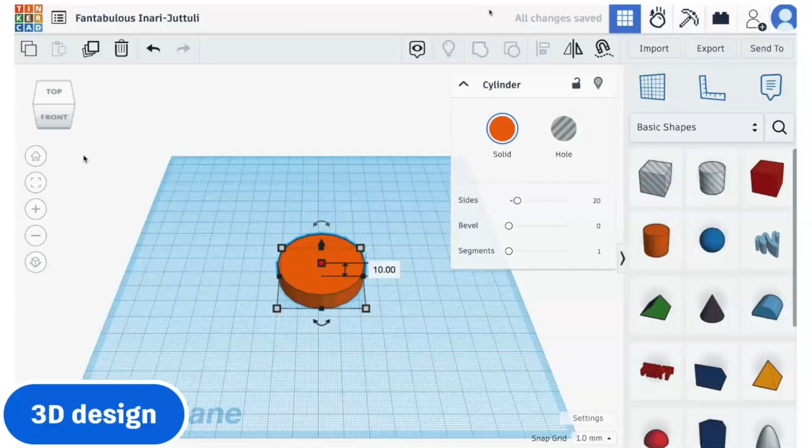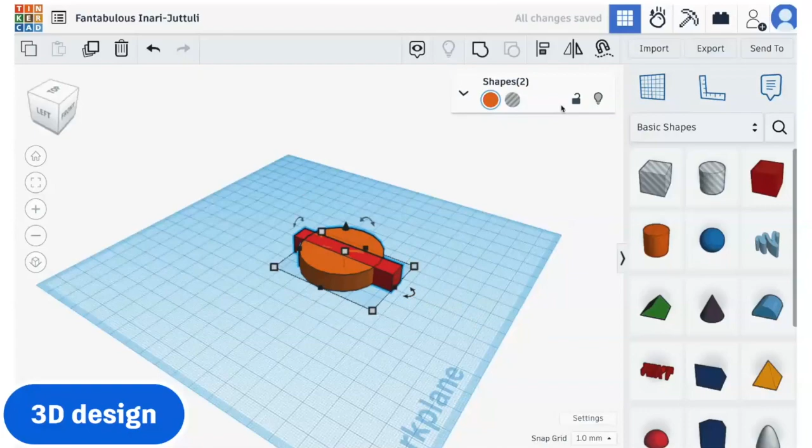Before we get into code blocks, Christian mentioned there are 3 different applications within Tinkercad, and I want to preview that so you know the scope of what you could be designing with, in case you're new to Tinkercad. Lately we've talked a lot about 3D design, which is what the majority of our webinars have been on so far. In the 3D design space, you can combine multiple shapes to make just about anything in this very intuitive interface, so students can design different parts, models, and 3D worlds. In our previous webinar, we talked about SimLab, an exciting way to simulate real-world physics with your designs. As a reminder, if you've missed past webinars, you can check out the recordings on the YouTube channel.

Another application space we plan to talk about in the future is called circuits. This allows you to drag and drop electronic components to build electronic circuits right in this interface, and actually simulate what those circuits might do if you were to build them on the table in front of you. You can bring in different types of microcontrollers to program and work with both analog and digital things in this simulated space, which is super cool.

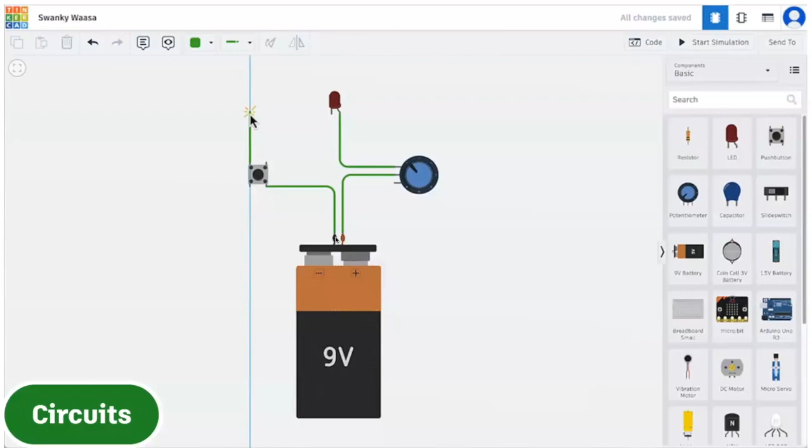And code blocks, I'm not going to talk too much about this because we're super excited to be focusing on that tonight. But as you'll learn, it's a great way for students to apply computer science principles to make really fantastic 3D shapes, and that's what we're looking to learn tonight. On that, I'm going to stop sharing and hand it over to Christian, who's going to get us started with code blocks.

Let me share my screen here. I'm going to take you guys through a couple of projects, and then I have a few extra projects we'll look at the end. To get started with code blocks, all you need to do is log into Tinkercad. Then you have this blue create button, and I can create a code blocks design type. You can see the other types there that Jason just mentioned. So here's my code blocks editor. On the left-hand side, you see my blocks panel, and this is the blocks editor here, and this is my 3D editor over here.

So here's my new one. Okay, there we go. Now if I right click around in here, I can orbit around in the 3D space. If I use my zoom wheel, my mouse wheel, I can zoom in. You can see I zoom in, I see these 3 axes here - this is the X, Y, and Z. X is the red one, Y is the green one, and Z is going up, the up direction. I'll be referring to these a few times throughout the session, but let's just get started and I'll show you code blocks 101. Drag a block, there we go.

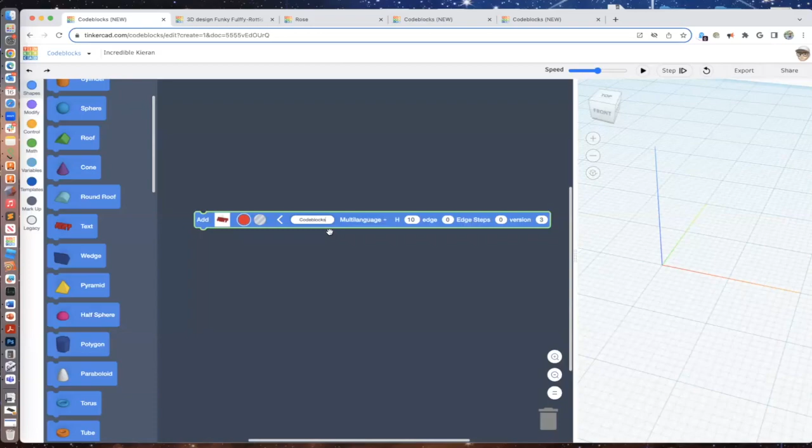Let's call this a text block. I just dragged this blue text block out, and I'm going to say let's call this 'code blocks.' I'm typing the text 'code blocks' here. So I don't see the 3D object yet.

To see the 3D object, or the result of my stack of blocks, in this case one block, I can click play, and voila, I get the code blocks here. I like it. I'll just zoom out a little bit. I can resize these back and forth so you can see how you can work back and forth on them. You can also zoom in and out with the code blocks here.

I'll leave them somewhat big so you can see them. I know we're a little tight on space, so I'll just use the panning. Maybe I'll go a little farther out. I'm going to adjust the height here.

Once I have the block in the actual blocks workspace, I can change the parameters of these blocks. So I don't want it to be 10 millimeters tall. These units are in millimeters, by the way. So this text is 10 millimeters tall.

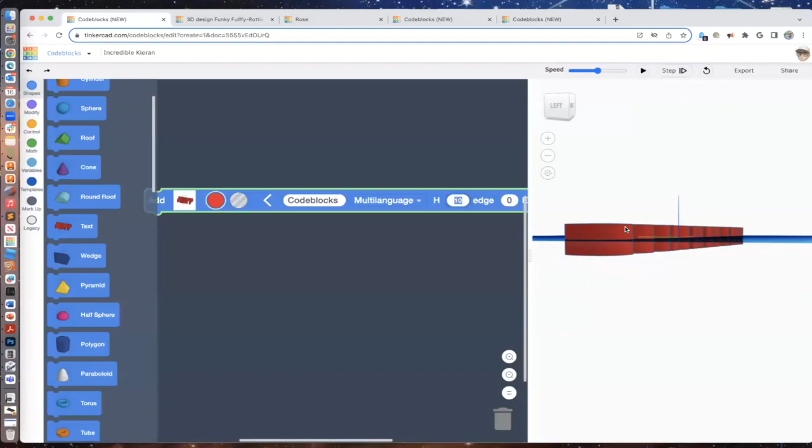You can see it put it right at 0,0,0, where those X, Y, and Z axes intersect—that's called the origin, 0,0,0. Since it's 10 millimeters tall, the text is 5 above and 5 below, because it references the center of that text when it places it.

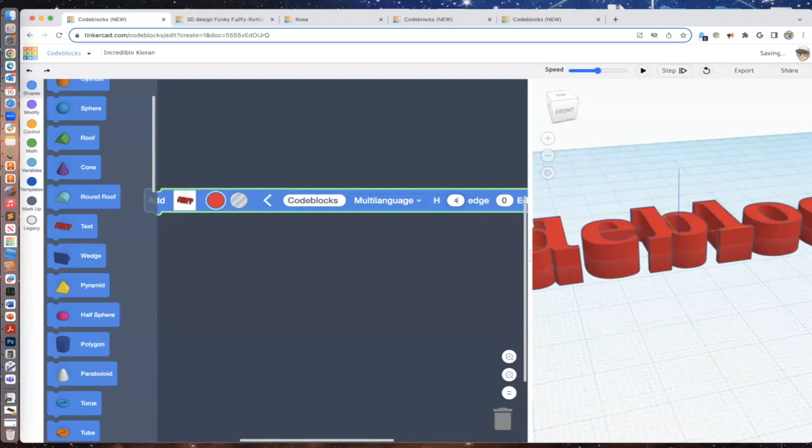So I can make this 4, and if I play it, it's going to be much shorter. Since it's a total of 4 high, it's 2 above and 2 below. So what I want is for that text to be on top of the grid.

So I'll come down to my purple code blocks, and I'm looking at a move block. You see this move? I'll drag it right underneath, and I can just snap it underneath, and you'll hear a little snap.

What I want to do is move it up in Z, half of that height. So I'll move it up 2, okay? And I'll play it—you see that?

So it created the block and then moved it up. I'll play that one more time so you can see it. Great. Okay, another thing I can do—this is called a translation. I'm moving it.

Another type of transformation is scale. So I can bring a scale block and pop it underneath there. Let's say I want this text to be half the size it is, so I'll put 0.5 in that parameter. Then I'll play it—so it'll create the text, move it up, and then make it smaller by half the size. Make sense? I think it's pretty easy.

Okay, we're getting somewhere. Let's go ahead and put a backplate here. But before that, let's make the color of this text different. I can click this swatch and change it to, let's make it orange. Okay, let's play that. Great, everything's working as expected.

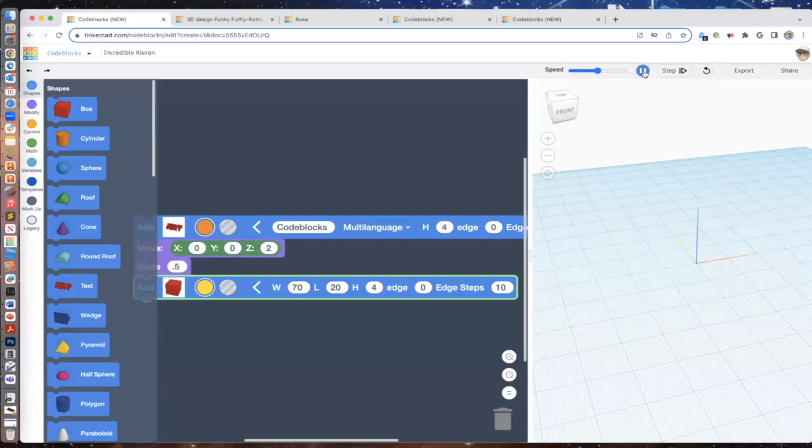Okay, now I have a pretty big box back there. That might be too big. So I might make this smaller, that kind of thing. Maybe I'll make this 20 and 70 and 20 and then play it. You can see that I get something that looks more like this. And I can keep iterating here. Let's make this 90 and so on and so forth.

Well, that's great. But what happens when I go and change the name? Then the box doesn't fit, right? So let's just call this new text, something like this, and play it. So now I have text, but this box is too big.

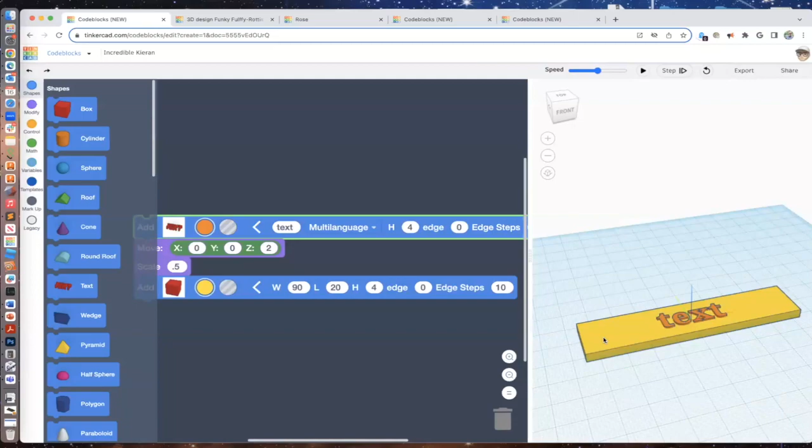Well, we have some handy new sizing blocks that will help us resize this. So I'm going to show you how this works. If I move down here, let me go ahead and put this back to code blocks. Okay, and I'll just play that.

One thing you can do is speed up the way it plays back. I kind of leave it on this average size so you guys can see how this is playing out and what's happening, but we may speed that up later.

So I want to make this box always fit the text. We're building an auto sizing name tag. This name tag will always look great no matter what text you put in there. It's all based off the text, so this box needs to resize itself based on what the text we've entered in there.

So I can come down to these purple oval blocks. This one says size, and I'm going to say I want this size, the width of this box, to be the size in that x-axis. So what the size block does is it looks at the previous created object, which in this case is the text, and it looks at the size in the x. Then it puts that number in itself, and you can use that later. So for this box, when I play this, it's going to be the exact width of that text. Watch this.

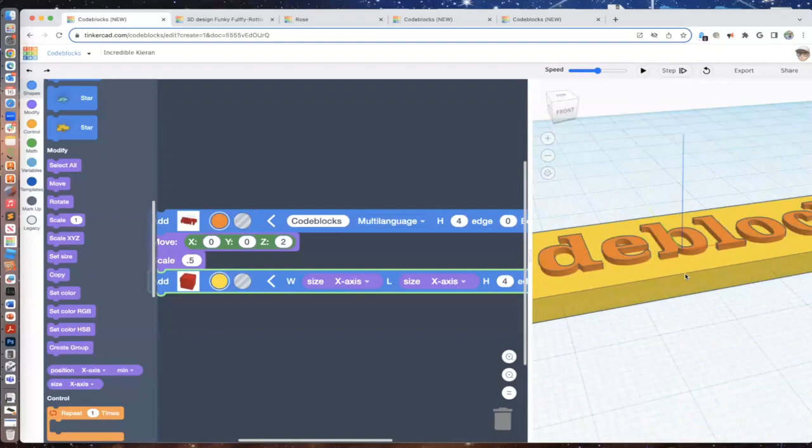Great. Let's do the same for the length of this box. I'll right click on that size block, duplicate, and it follows my cursor. I can put that right in there, but I don't want the x-axis, I want the y-axis, which is this green axis, the height of the block. So I'll say y, and now play. Great. Awesome, so it's totally fitting it perfectly.

Now, no matter what I put in here, I could just put in my initials, right? And it will perfectly fit. You see that? Great, this is what I want. This is the start of my auto sizing name tag. I'll put it back to code blocks, play it, and everything's working as expected.

Good, now I don't want it to fit so tightly, so what I want to do is do some math. And this is very easy, don't get intimidated by math, it's very simple. This is a good one maybe to show your students. I'm grabbing this one with the two circles on each side and an operator in the middle. I want it to be this size, but I want to add a certain padding, so I can say let's put 5. Okay, so I have the size of the text plus 5 in the width.

And I'm going to do the same here. I'll drag that out, put this one in here, and make it 5, so I can have that length be that. Okay good, so that's the size of the box. I could also do the height, in case my height changes. I can come back and grab a size block and put it in here, but I want the z-axis for this because that's the up direction, right?

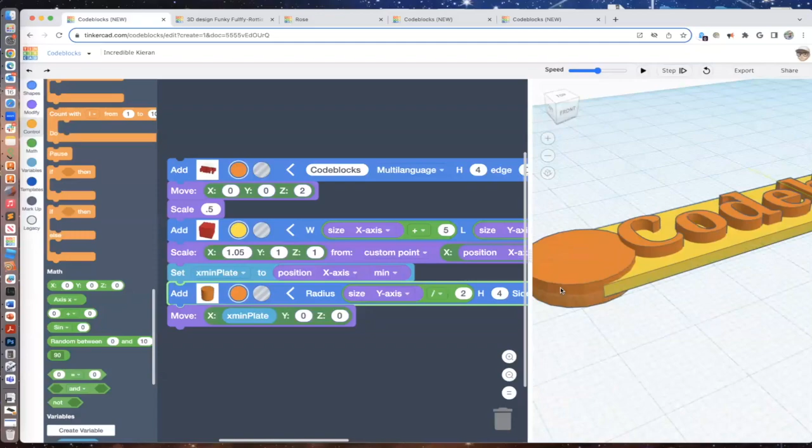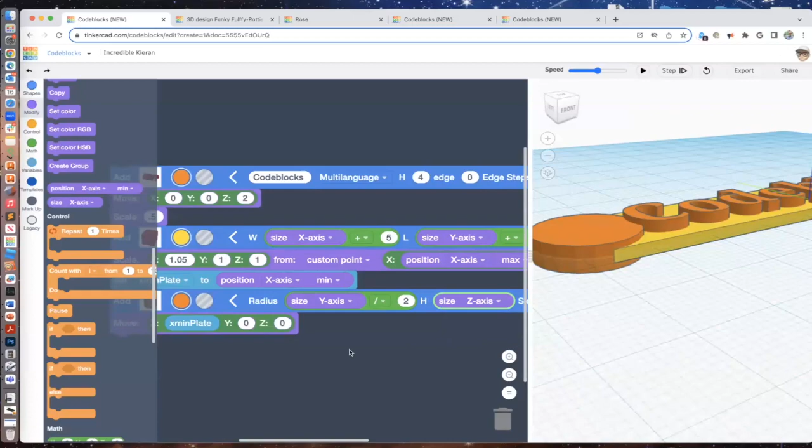I want this to be the size in the z-axis, so I'll use my handy size block and make sure that this says z, so I'm matching that block. Okay, let's play this and see where we're at. There we go, see, now this is looking really nice.

And now I only have a couple more steps here, so bear with me. I'm going to right click on this cylinder and duplicate. Now I have 2 of the same things happening, but I want this to be a smaller hole that gets cut out, so I'll say this is a hole.

Also, I'm going to get rid of this green math block with the size in it, and I'm just going to say I want this to be a radius of 4. Okay, so let's play that and see where it brings us. I promise we're almost to the end here, and then we'll see how our code works.

Great, so everything's in place. Now I just need a group. And you can see what grouping does is that if you have hole shapes in your recipe here, it will cut them out. So watch me play this through, one more time.

Great, and of course I can make this cylinder be the same color as the back plate. What I'm going to do is just speed it up by clicking the speed all the way to the right, then playing it, and it will play back a lot faster. And you can see there's my finished name tag.

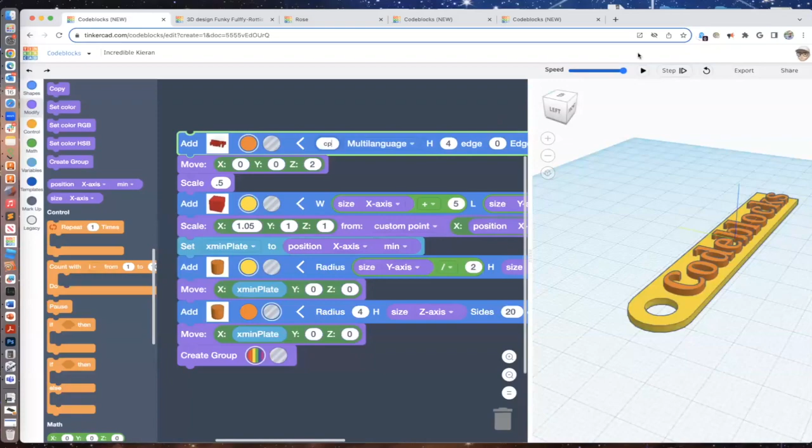Now, the beauty of this, and why I led you through this whole thing, is that you can type whatever you want up here, and using those position and size blocks, it will always fit. I can add a little more space on my scale XYZ if I like, but you get the idea.

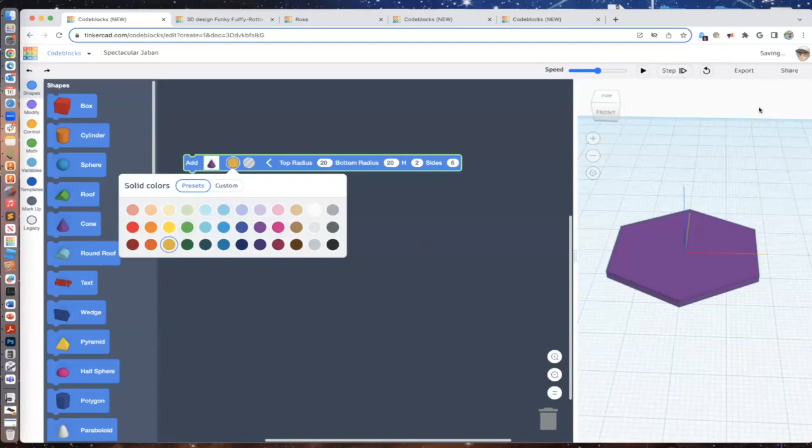So let's look at what we get. Okay, so this will be the shape of our vase, this is one layer. I'll change the color to something a little easier to see. Now, what I want to do is move this up so it's sitting on the grid. I made it a height of 2, so I'll move it up 1 so it sits right on top.

Again, Z is up, so I'll put it in 1, and so it'll create that and move it up. Great. Now I want to add

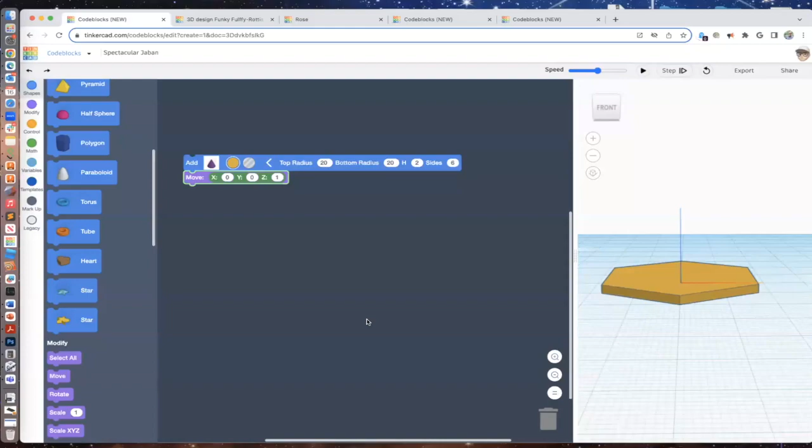A shape to cut it out. So I'll use a cylinder, and this is going to be where the flowers go into the vase. I don't want it to be a solid, I want it to be a hole. Remember, I used a cylinder to create the name tag hole—I'm going to use the cylinder to create a hole here again. And in this case, I want this radius to be 15.

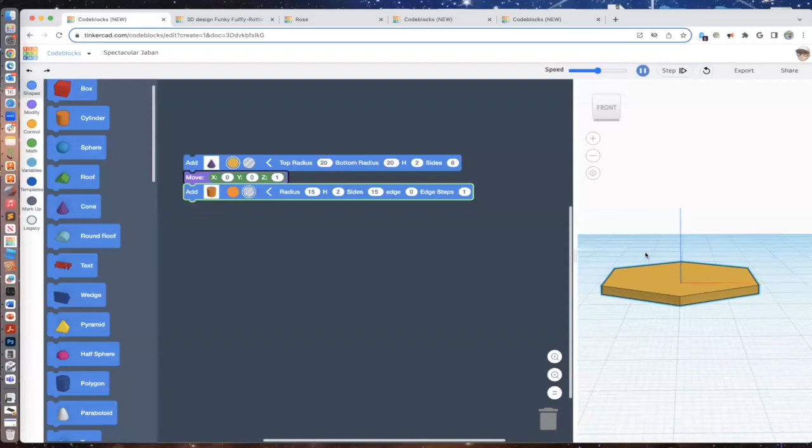Let's see, I'm just looking at some of my notes here. I want the height to be 2. Sides could be, let's just make it 15 or so, and play it. And so we should have that come in. And yes, it's there. You can't quite see it because I haven't grouped it yet, so let's group it.

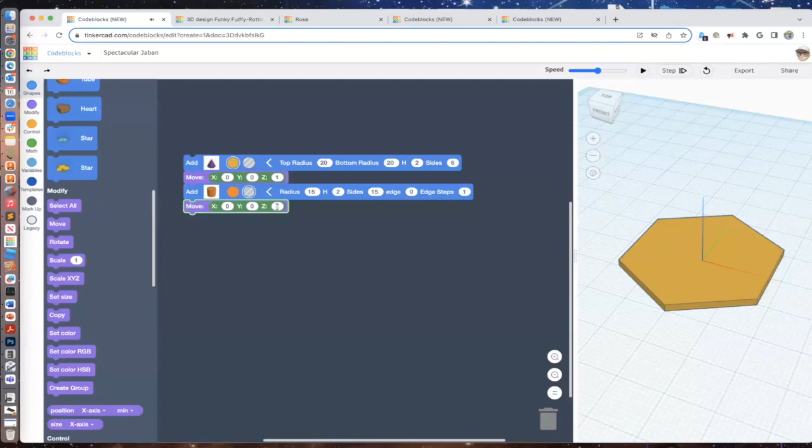Again, let's see, I'm going to move it up. Let's move this up 1 in Z. Play that. There, now we see it on both sides. So when we group it, we get the hole.

Check this out, so this is going to be great. Okay, this is going to be the basis for my vase. Okay, so I want to do this over and over and over. So how do I do that?

Well, in coding, we have something called a loop. So this is a repeat block that I'm going to drag out, and I want to do this, let's just say 25 times. Okay, I'm going to basically find my copy—I'm going to copy whatever was just above it. So I'm going to do this 25 times: copy it, move it,

And rotate it. Let's do a rotate. So let's enter some parameters here. Copy's fine. Move, I want to move it up 1.5 because it's 2 high, that element. So I'll move it up 1.5, so it's slightly overlapping—I get the right there. Yes, and I'm going to rotate about the Z-axis since that's the up direction. So it's going to spin around its axis, and I'll get kind of a twirling effect. And I'll change the angle by 5 every time I create that new one.

Okay, now my pivot, I can leave this at 0. I like to put this in there in case I want to try spinning something. So let's see what this gets us.

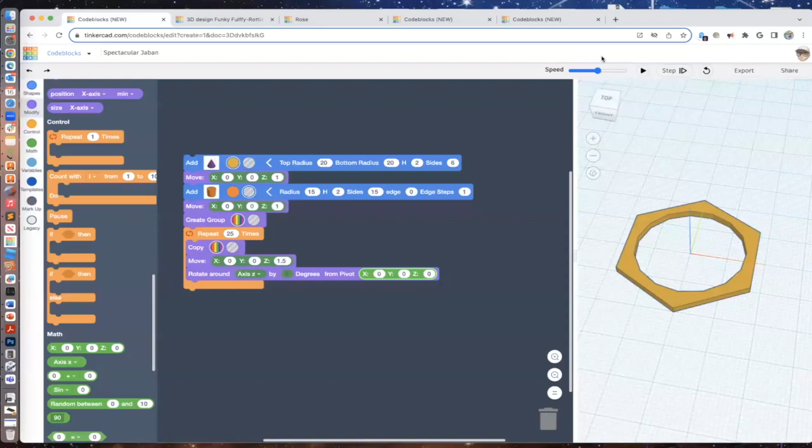It's going to create that base layer, then it's going to duplicate it, and I'm going to make this go a little faster so that we can see the result. And now you can see we have our rotating effect on this base. That's kind of fun, right?

I can add a bottom by just putting in one of these guys here at the bottom, and that will be at the end. And we'll call this same color, that color. And maybe this has to be a top radius of 20 and a bottom radius of 20.

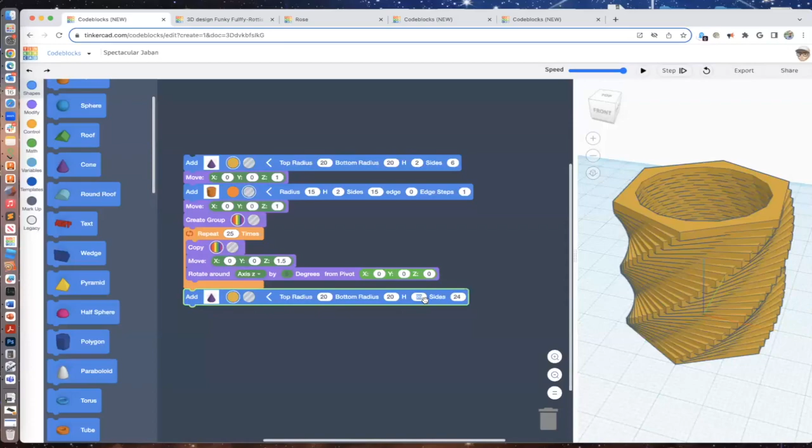So I'm seeing some emojis. Thank you for the emoji applause, I really do appreciate that. I'll just make that—there's more. Thank you, so that means you're liking this. Very good. Okay, so we got that.

Now I want to show you some—so this is a repeat block. Now check out what I can do with this. You saw how I had like this rotate in here—what if I just put 5 in here?

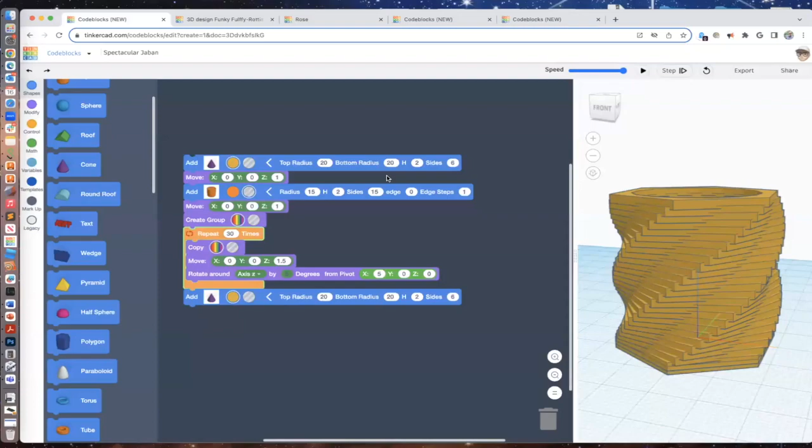So it's going to rotate about the x equals 5, meaning it's not going to be exactly on that origin rotating about, and we get a different effect. And I'm going to just bump this repeat up to like 30. Oh, 30, now watch the effect I get. Now it's kind of off center, rotating around.

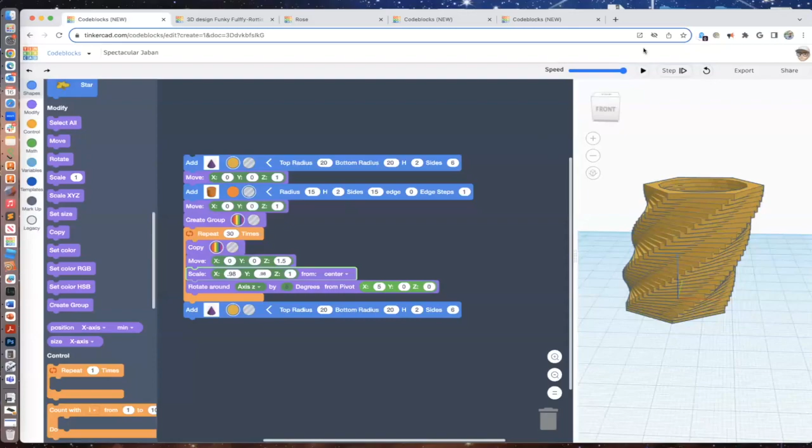That's interesting. What if I added a scale in here? Let's do a scale, so a scale from center. I'm going to use the scale XYZ in here. And check this out: every time it goes through, I'm going to scale the X and Y, which is just how it sits on the table, not the height. I'm going to scale that by 0.98, so it's going to get incrementally smaller and smaller. Okay, now watch this—when I play this, you see how it's getting smaller and smaller as it goes up?

And sometimes when Codeblocks freezes like that, you just have to let it think a little bit. It'll keep working.

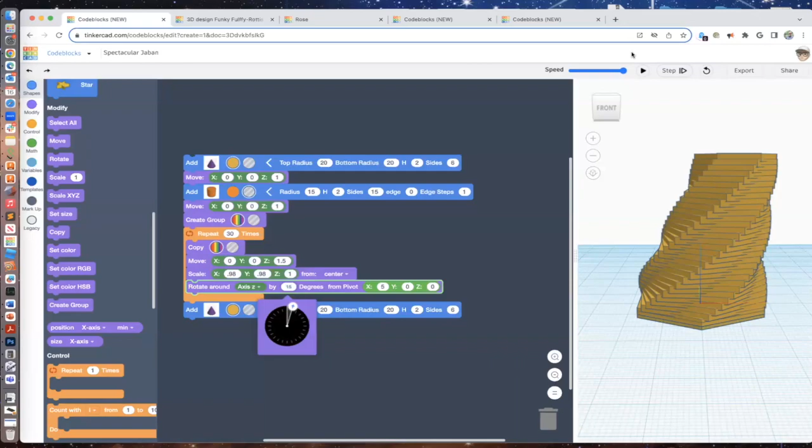Now that's interesting, but maybe I could change this rotate angle by a little bit more. I'm going to make it 15. This will really accentuate that offset rotation and gives me that sort of corkscrew effect. Kind of looks like a horn now, a little bit. So you can look closely at the pattern.

You can tell CodeBlocks is thinking at the moment, so just let it run if it gets hung up. But you can see that now these shapes are all staying the same size in Z. They're the same thickness, but as they get higher, they're getting smaller in X and Y. That's the nice thing about the scale XYZ, and I'm just doing it about the center.

One nice thing you can do is turn this into orthographic view to make sure you can still put a flower in there, and you can still see the bottom there. That's fine, so that's the idea.

Now I'll put this back. This is not really an easily 3D printable vase, so one thing you might do is put this back so it's just going straight up and down. And maybe just rotating this by about 10. I can play that.

Now check this out. Let me go back to my perspective view here. Christian, we have a question from the chat - they're asking why did you use a cone shape instead of like a cylinder or polygon? I'm going to show you that right now.

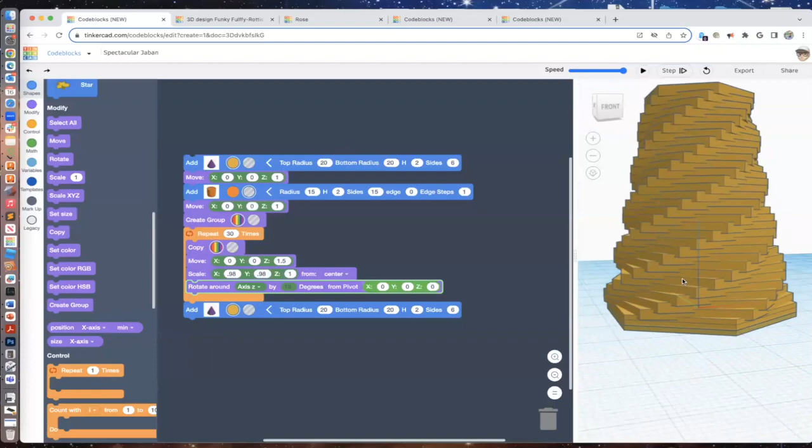The reason is, if you're going to 3D print this, you'd have all these overhangs wherever you see this hanging over. One thing I wanted to do was make it so that it doesn't have the overhangs. Instead, it creates a gradual ramp.

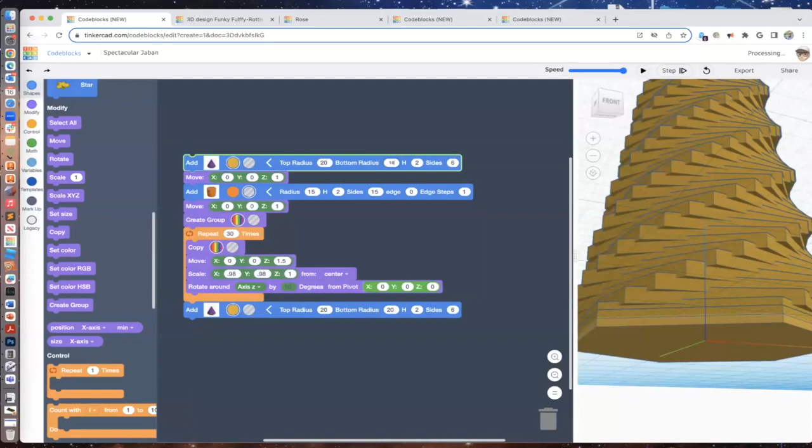So what I can do is come up to this top cone and change this. How did I do this? I'll refer to my notes. But basically, I make the bottom radius smaller than the top radius. Watch this - I'm going to make this 18, and watch what happens to these overhangs. They're gone. So it's going to print on the previous layer and then work its way out. Cool.

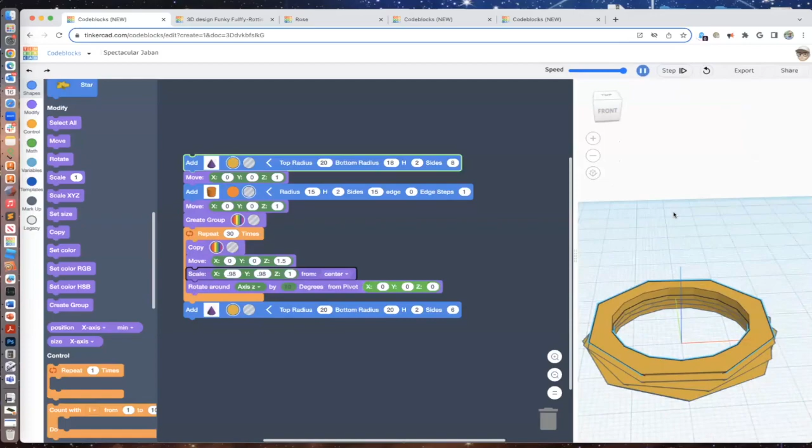Also, another reason I use that cone shape is it has a lot of these parameters in here. You can change this - if I want it to be 8 sides, I just change that to 8, and now I have an octagonal vase. Again, I don't have overhangs.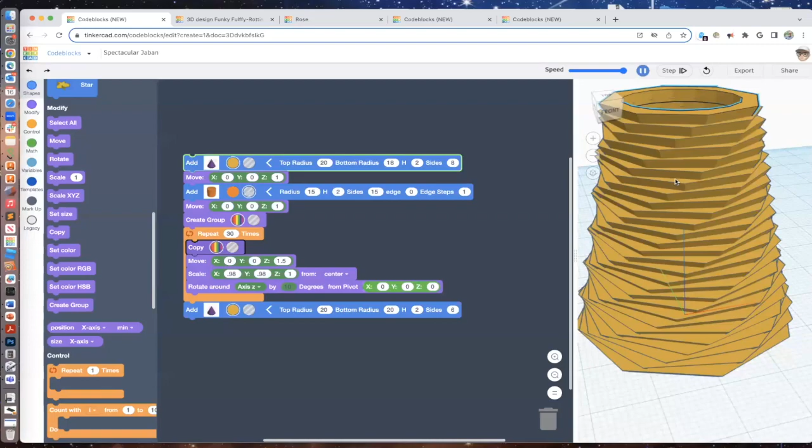I was playing with this today and learned that some of these you can just keep playing with the numbers and find new ways to design things. There's really no way to know what it's going to do until you play with it in the CodeBlocks editor. That's really fun to discover. Okay, so that's enough on that one.

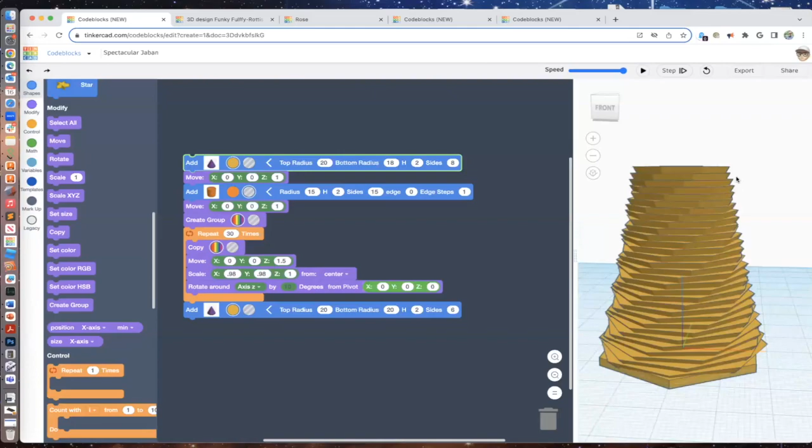One thing I will do is show you that you can edit these in the 3D editor. There, it's just finished. This would print if you have a big enough, tall enough printer for this, but what I want to do is now bring this into the 3D editor.

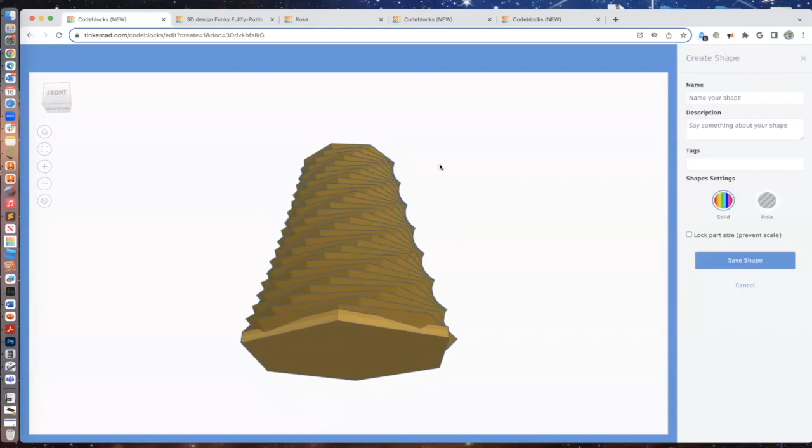So let's go to export, and I'm going to click shape. Shape will allow me to bring this into the actual 3D editor that we saw at the beginning of the webinar, and here I'm publishing the shape. I actually did this earlier, so I won't - it does take maybe 2 to 3 minutes for something complex, and I won't waste anyone's time here. So I'll just show you an example.

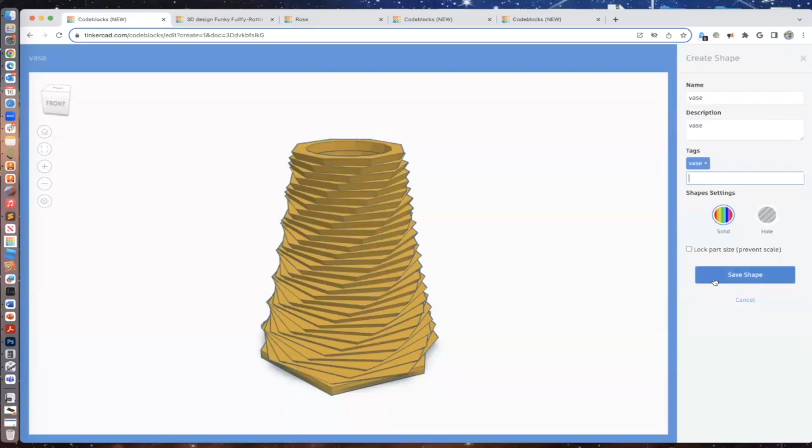You give it a name, a description - vase made in CodeBlocks - you get the idea, and tags if you want to be able to search it out later. Then you click Save Shape. I'm not going to do it right now because I have one that I created already and I'm going to show you that. So I'll click this Tinkercad logo to go back.

So here's the 3D editor, and you'll find those shapes that you save in your creations up here in the shapes library. You just click in the shapes panel, click that dropdown, and you'll have categories - you choose your creations. And here is a vase that I created earlier.

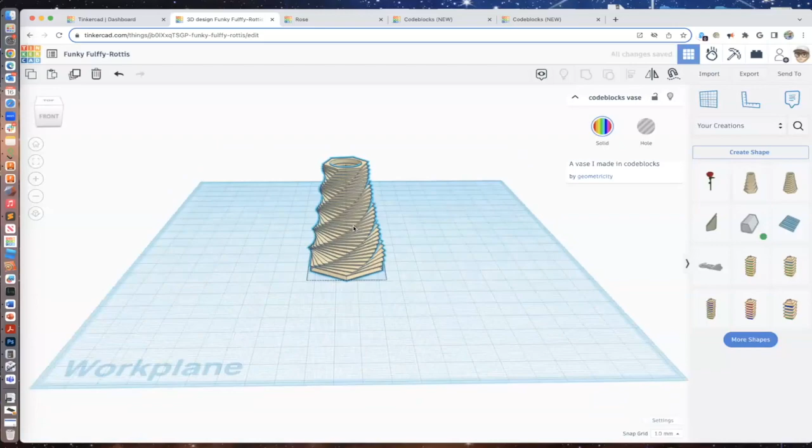Here's a rose that I found in the gallery, and it's much bigger than the vase, so what I might do is scale that down. I'm going to click this handle, press Shift, and scale it down.

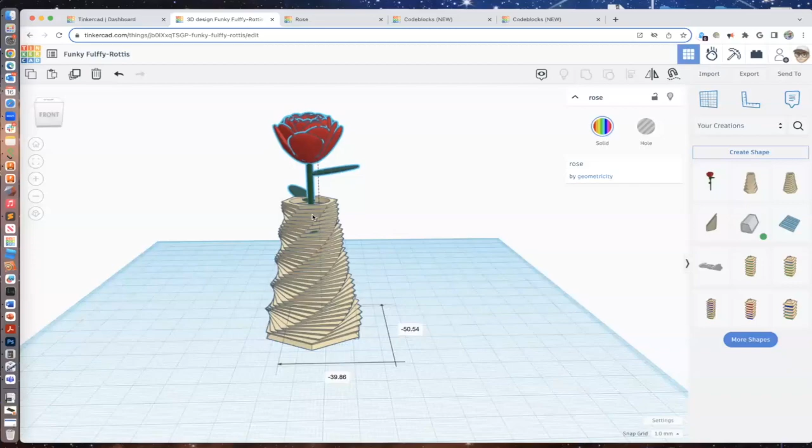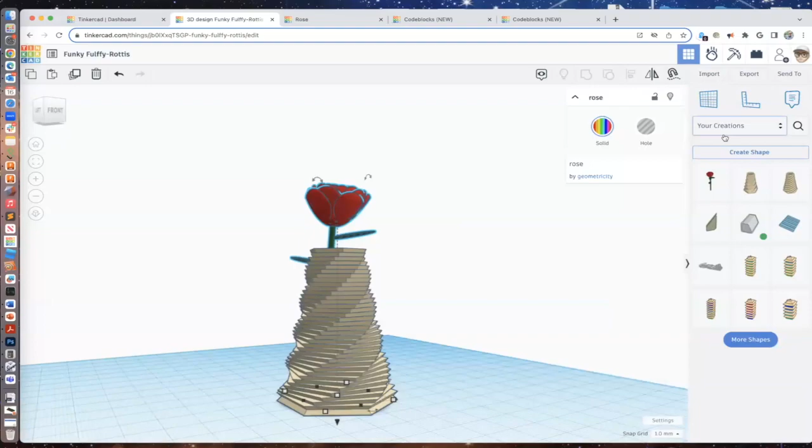Press F to zoom in and put that right inside. You kind of get the idea. Yeah, we have a little bit of self-intersection here, but that's the idea. You can bring those code block designs in here and use them within the 3D editor. And of course, you can go ahead and group any objects with this, cut more objects out of that shape, that kind of thing. Okay, so that's that workflow.

Now I just want to show you a couple extras that we're going to share with you in the PowerPoint. By the way, here's that rose made by Eagle in Flight. Thank you, Eagle in Flight, wherever you may be.

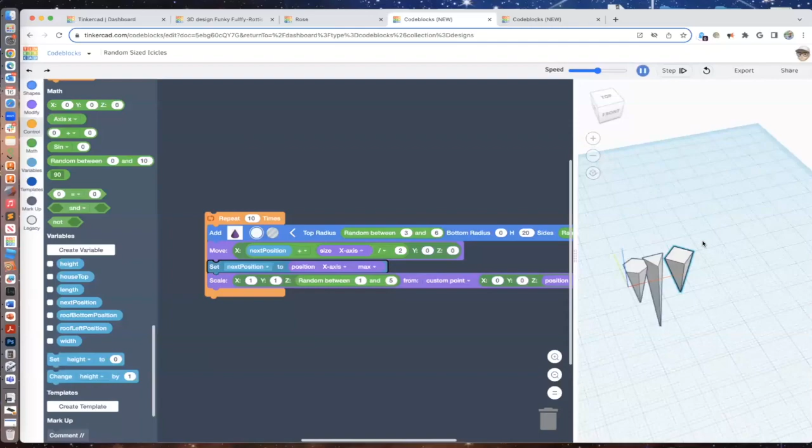Within this repeat block, I'm continually setting my variable for the extent of that x position in max, and then I'm moving the next one there, and setting it again, and just keep going. So if I look at this, no matter what I do, I have a random set of icicles. These are all different sizes, and they're always going to be perfectly in a line.

That position block is very handy when you're building objects and they become complex, and they need to sit on top of something, or you need to stack it. You can use that position block, set it as a variable, and then use it later. It's very handy in this loop right here, for example.

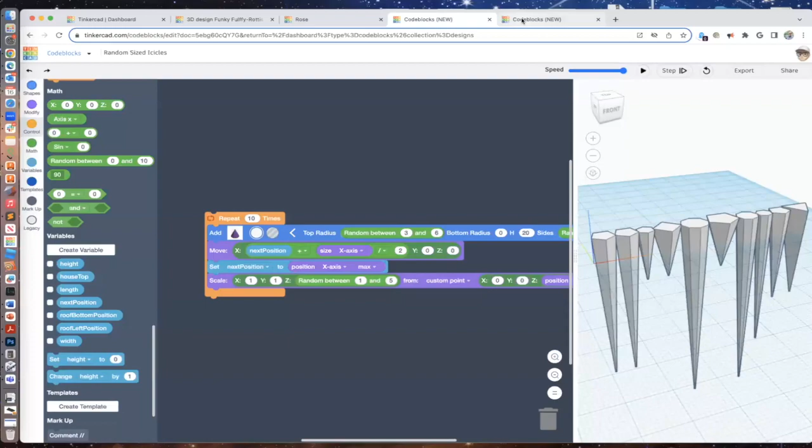Appreciate it. This one is a lot more complex, and I'm not going to go through it too much, but when I play it you'll kind of see what it does. I'm going to speed this up because here I'm making a random set, here I'm making a forest. Okay, let me expand this. Now every time I play this, I get new randomized trees and randomized locations. And it's very fun.

So you think about building levels or environments for the things that your students are creating. I will just quickly finish this. What I want to point a few things out in here.

Okay, so here you only see these blocks. It's creating a template of a tree, and then it's moving it to a random location. That's all you are seeing here. All of the secret sauce is in these templates. So you can create templates which contain functions. And this is sort of introducing people to coding ideas. Functions carry out a set of instructions.

You can create a template down here, very much like you create a variable. You can see I've had several variables in this, but in this template, I have it compacted down so I can expand it. Okay, so here's what's going on inside, and here I'm creating branches. I won't get into the details, but basically I'm creating a random set of branches. I think it goes from 1 cone to 5 cones, and I'm making them scrunch up together and be green like branches do. So I'll go ahead and collapse that.

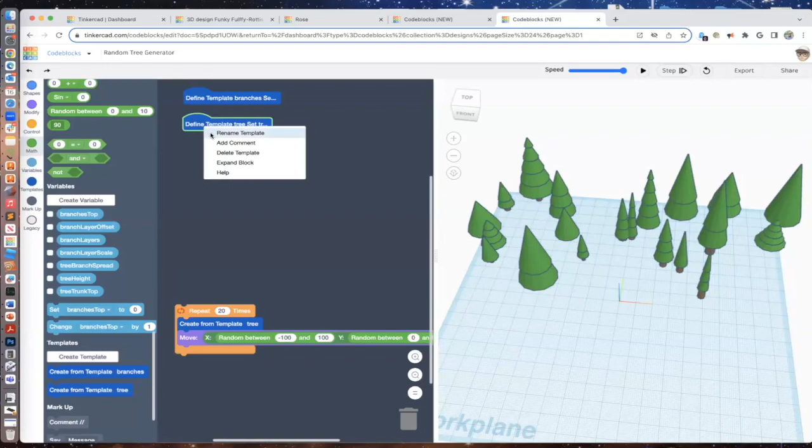And then I'll bring up this template, which actually calls the branches template. So this is the tree template. And if I expand this, you can see I'm calling that branches down here. So I'm creating the trunk. You can see, just look at some of these purple blocks, you can see I'm using that position a lot. I'm using a lot of random.

And again, you'll get the links to this, so you can go break it, pick it apart, do whatever you want to it. But it's creating that branches within this template.

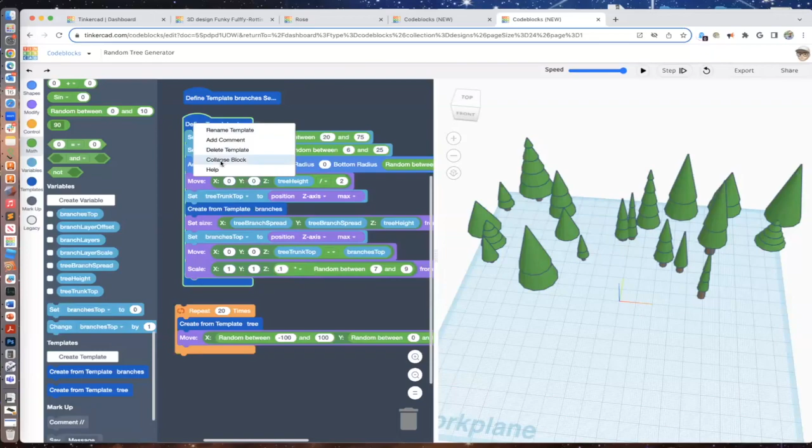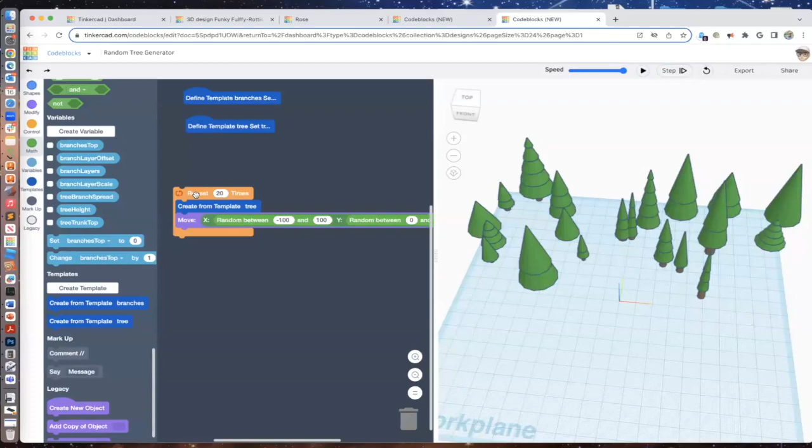So I'll collapse that. So I have my branches, I have my tree template, which calls the branches. And then here, I'm just creating 20 of them by calling that tree, create tree templates. So I can just drag this out and it will create a tree, one of those randomized trees. I'm putting that inside a random block or a repeat block and creating a whole forest. And no tree is the same.

So the power of code blocks, you really have to give it some thought, computational thinking, how you might build stuff with the blocks you're given, setting variables and templates and then using those wisely. You spend a lot more time thinking about that.

But then once you build it, like my name tag, I don't have to rebuild that name tag ever again. I can just put somebody's name in there and it builds it. So I can do that for 30 students in my class, and I can 3D print them, and I don't have to rebuild the same thing every time. Or you put that challenge to your students and have them build it.

So I think that's it. I think you've heard me talk enough.

How are we doing? We're doing great, Christian, and that was absolutely fantastic. And we had a ton of really fantastic questions in the chat that I'd love to just take a minute to recap and kind of highlight a few things. But huge thank you from all of us, because that was awesome. I think this was a first experience for many of our attendees, and I think everyone's super excited to see how code blocks can be used in Tinkercad. So really fantastic, and thanks so much for sharing.

Lots of emojis. I don't think I've gotten this many emojis personally in any of the past webinars. So you've definitely taken over and you've won the emoji wars. Not that I knew that was a thing. Thank you. That really means you were listening and you enjoyed what I had to share with you today. Thank you so much. Awesome.

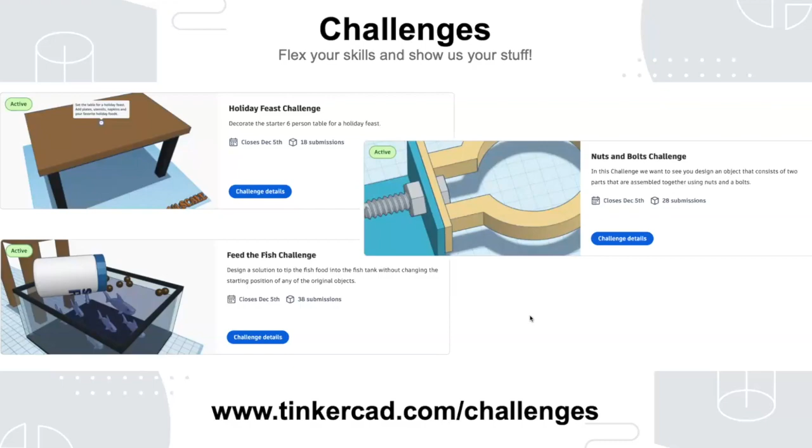We also have contests on Instructables, specific to Tinkercad and Fusion if you're with older or more advanced students. We have the robotics contest, which is always a fun one. We have jewelry, another one with a Tinkercad prize. And we have Make Some Noise, which is basically anything that makes noise — it could be an instrument, a stereo, or just something really noisy.

I encourage you to check that out. And then we have one for educators, the project-based learning contest, where you can share how to use Tinkercad in the classroom or just general project-based learning content.

On that, I want to remind folks what our next webinar is going to be. It's in a slightly different place — our Level Up with Fusion in the secondary education webinar series, same place, same day, same time. We'll be talking about 3D printing better: tips for effective 3D design, how to take advantage of Fusion 360's features for preparing G-code and connecting to your 3D printer, and lots of great strategies for taking your designs into the physical world.